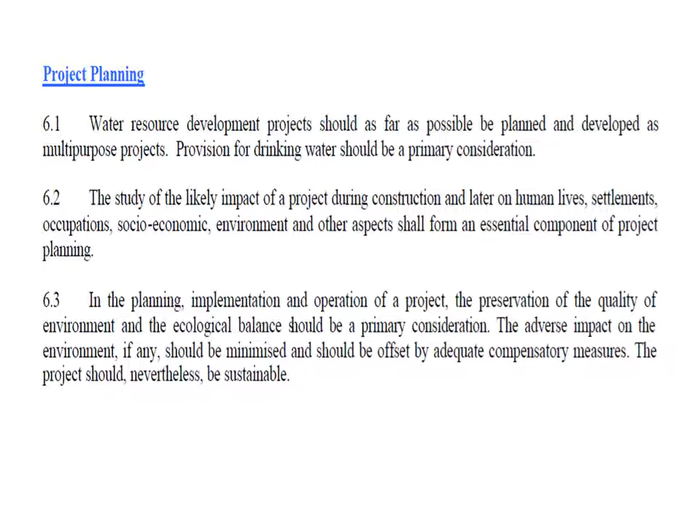With respect to planning, formulation, clearance, and implementation of all these projects upon any such area, keeping in mind the environmental and ecological aspects, an integrated and multidisciplinary approach is required.

This policy also emphasizes these things, and at the same time lays importance on rehabilitation programs, the R&R, the resettlement and rehabilitation of people who usually get displaced because of any such development projects. Special efforts should be given for investigation and formulation of these projects for the benefit of areas usually inhabited by tribals.

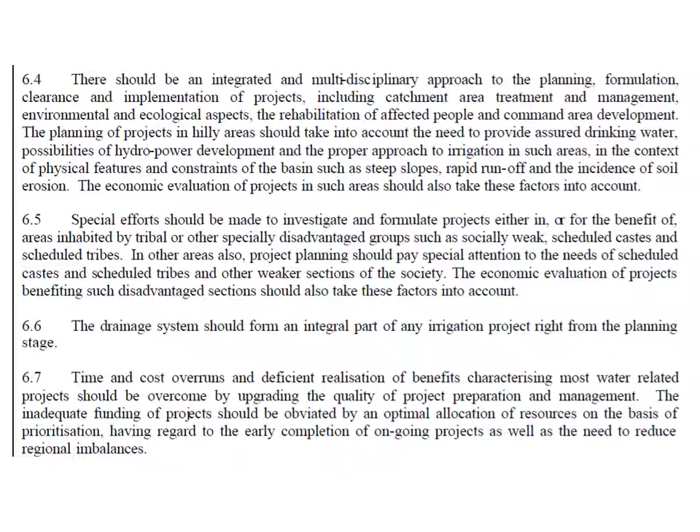Groundwater. Now despite the fact that we have water laws in our country, we have the Water Prevention and Control of Pollution Act 1974, and we also have a Water Cess Act, these two major legislations are quite silent when it comes to groundwater. Although there is a bill which has been pending for quite a long time with respect to groundwater management.

Several states have also adopted groundwater regulation and management, Kerala for example, even Assam, they have one. Now under the National Water Policy of 2002, groundwater development has been given significant importance.

There should be periodical reassessment of groundwater potential on a scientific basis, keeping in mind the quality of the water which is available and the economic viability of its extraction. So economic and qualitative viability has been given due importance under groundwater development.

Exploitation of groundwater resources should be regulated and should not exceed the recharging possibilities, so as to ensure social equality and equity. Any detrimental impact on the environment because of over exploitation of groundwater should be highly discouraged, and the central and state governments are responsible for effectively preventing such over exploitation.

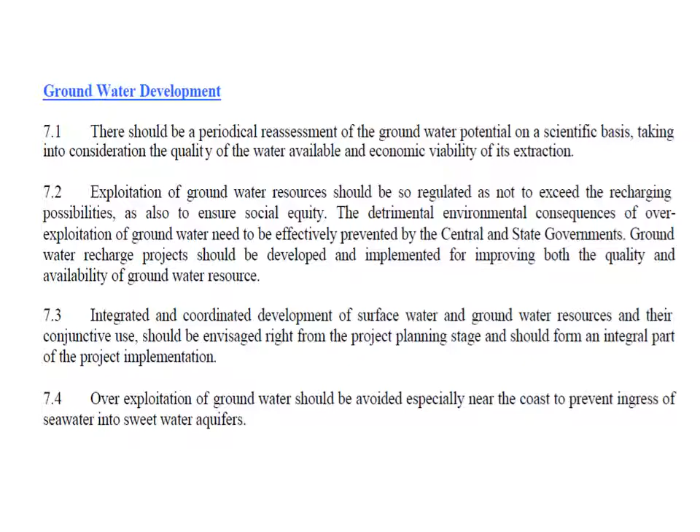There are also water users associations in several states, and municipal corporations do ensure monitoring, because many times, as we see in day-to-day life, people have been digging bore wells to extract groundwater, and many a times they over extract. That is what the municipal authorities are trying to monitor, laying down certain standards and guidelines, and also prohibitions with respect to such over exploitation of groundwater.

Drinking water. Well, when it comes to priorities, drinking water usually gets rank one position. We know that the right to drinking water is a fundamental right, pollution-free drinking water is a fundamental right, but at the same point of time, when it comes to providing the facilities, the service delivery, we do have to pay for the same.

Now adequate safe drinking water facilities should be provided to the entire population. That is what the policy framework suggests, and it is not just applicable to urban areas, but also rural areas.

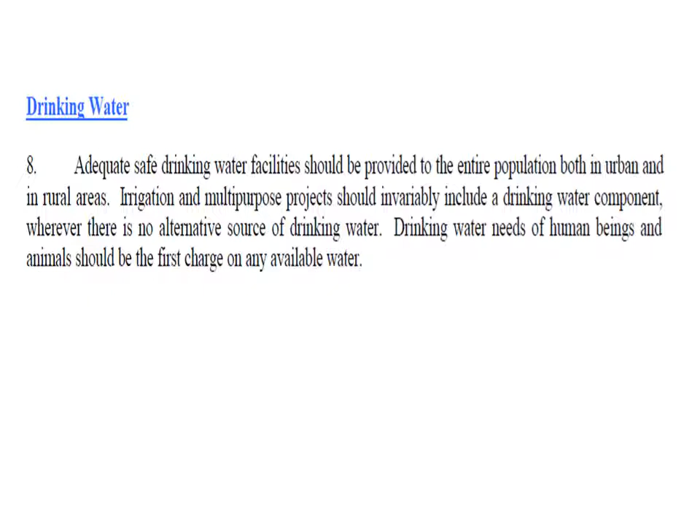Irrigation and multipurpose projects should invariably include a drinking water component, and when there is no alternative source of drinking water, it should be integrated there. This policy also identifies that drinking water is a need of human beings and animals at the same point of time, and it should be the first charge on available water.

Irrigation is another component of National Water Policy 2002, where the planning has been pretty much laid and emphasized. Irrigation intensity should be such as to extend the benefits of agriculture and irrigation to a larger extent, reaching as many farm families as possible. So the maximization of agricultural production, cost-effective irrigation options, and irrigation planning and management of any such project is very important.

There should be very close integration of water use and land use policies. It's not that the land use policy should deviate from the water use policies, and there is a dire need for close integration, because both these elements become part and parcel of agricultural production.

Water allocation is another crucial factor. If you are from a rural area, you must already be aware that when it comes to irrigation, many times the farmers struggle to share the water resources. So water allocation in the irrigation system needs to be done with due regard to equity and social justice. The language of this policy is very clear and pays due regard to equity and social justice.

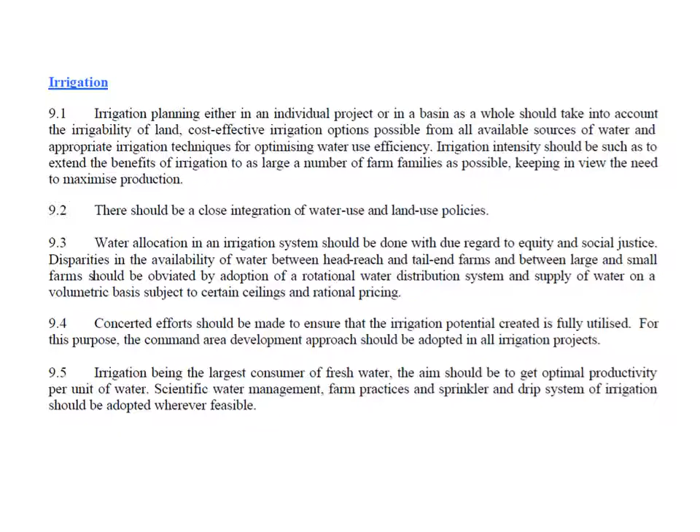Private sector participation has been encouraged in planning, development, and management of water resources projects in the country. Why is private sector participation required? Because private sector participation, along with the government sector, is responsible for several ideas, finance, corporate management, and service efficiency. In order to boost innovation, get financial aid and resources, improve corporate management, and improve service accountability and efficiency, private sector participation will be of great help. This is what the National Water Policy also talks about.

When it comes to quality, not just groundwater but also surface water quality should be monitored. A phase-wise program should be adopted. Whatever effluents the industries are generating should be treated to acceptable limits, levels, and standards before discharging them into natural streams. There should also be a minimum flow ensured in perennial streams for proper maintenance, to keep the ecological balance intact.

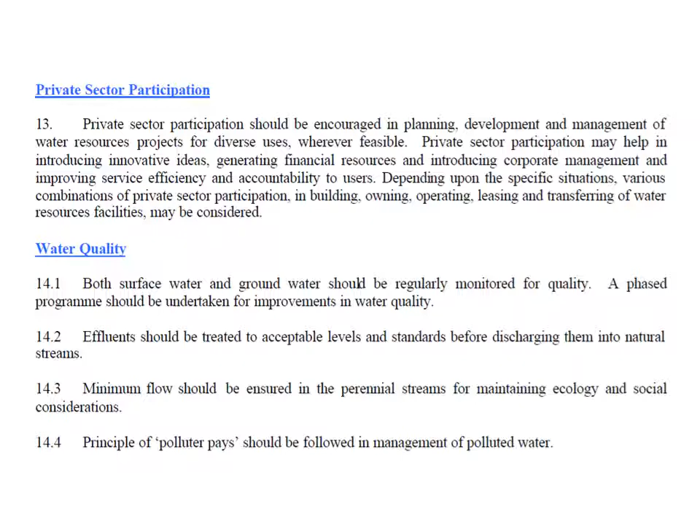And the principle of polluter pays, which we have already discussed, should be followed in management of water pollution. So when it comes to water quality, ensuring standards, and monitoring water quality, the principle of polluter pays should be followed, and the National Water Policy clearly talks about it and envisages the same.

In addition to that, the policy also talks about zoning. It talks about economic development and activities, which usually include not just agricultural but also industrial and urban development. They should be planned with respect to the constraints imposed by the configuration of water availability. That is the reason the policy is suggesting water zoning of the country, which should be guided and regulated based on economic activity. That is the nexus with respect to water zoning.

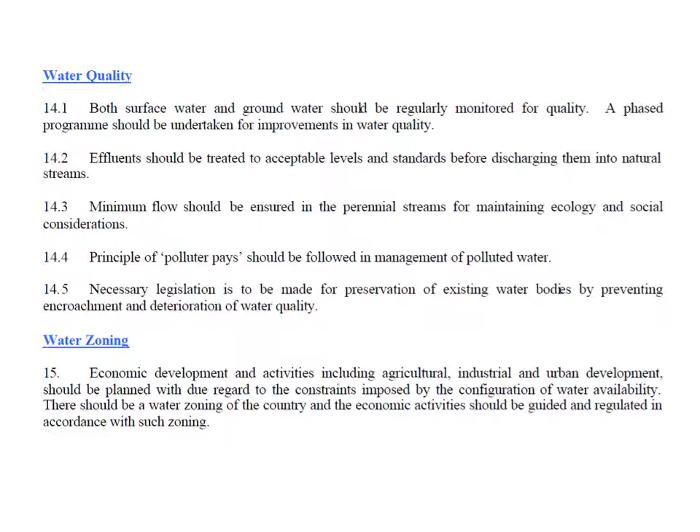Planning, management, and development can never be successful unless you have proper conservation consciousness. That is the reason conservation consciousness has been promoted by the National Water Policy of 2002, through education, regulation, incentives, and disincentives. Resources, in this case water, should be conserved, and availability augmented through maximization of retention, elimination of pollution, and minimization of losses.

For this, several measures can be taken, including modernization and rehabilitation of existing systems, like introduction of recycling and reuse treatment plants, adoption of traditional techniques like pitcher irrigation or mulching. Even drip and sprinkler irrigation may be promoted wherever possible, in order to conserve water. These are some of the traditional as well as modern techniques that the policy talks about, which should be adopted in order to conserve water.

Flood is another major problem which many states face, including Assam. So every state has been encouraged at the national level to adopt a master plan for flood control and management, especially for flood-prone basins. This is a major problem for the government, and hence the water policy talks about adequate flood cushion that should be provided in water storage projects, and wherever possible, to facilitate better flood management.

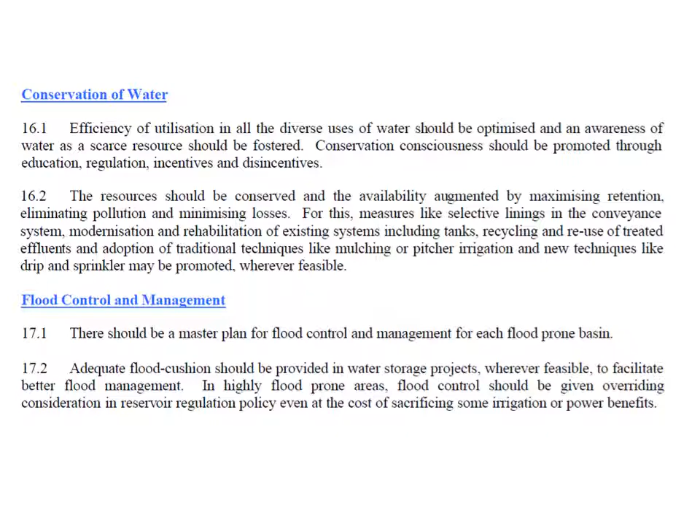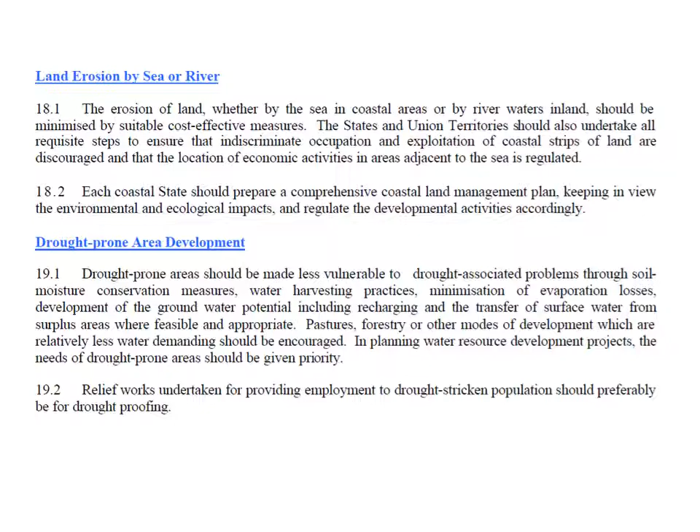You have to do that by taking certain regulatory policies, and you might also have to sacrifice something in the cost of some other benefit. So that is a permutation combination which the states are supposed to ensure with respect to control and management. In addition, drought prone area development and land erosion by sea and river has also found due significance under the National Water Policy of 2002.

In order to improve performance, there is a dire need for a paradigm shift in the management of water resources. That is the reason they have laid emphasis on allocation of funds under the water resources sector, which should be reprioritized to ensure that the needs for development, maintenance and operation of these facilities are met.

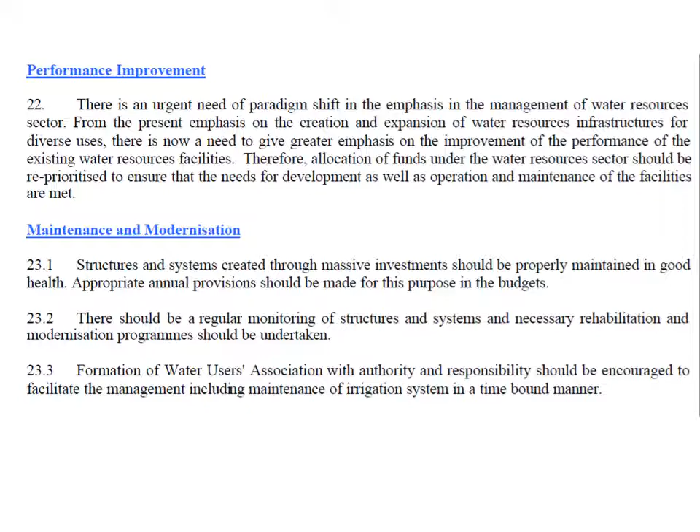Modernization and maintenance requires massive investments. Structures and systems should be created through massive investments, which should be properly maintained in good health, and there should be regular monitoring. Until you have regular monitoring, you cannot figure out what is going on and how far you have succeeded. That is the reason the National Water Policy of 2002 asked for the formation of water users associations, which many states already have. These associations have been given certain authorities and responsibilities to facilitate management, including the maintenance of irrigation systems, in a time bound manner.

Science and technology is something you cannot totally discard, because without research and development, without scientific know-how or even technology, you cannot have an effective and economic management of any resources, be it water resources or any other form of natural resources.

In this 21st century, the frontiers of knowledge need to be pushed forward in several directions, and there should be intensification of research efforts in various areas, which this water policy identifies as, for example, hydrometeorology, snow and glacier hydrology, surface and groundwater hydrology, water harvesting, evaporation and seepage losses, recycling and reuse, crops and cropping systems, and soil and material research. All these sectors are relevant, including water management practices and improvements in operational technology. So science and technology, research and development efforts should be there with respect to all these areas for an effective implementation of the national water policy.

Nothing can be done without proper capacity building programs. The perspective plan for any standardized training should be an integral part of water resource development, with emphasis on training extended to all categories of personnel involved in these activities, which also includes the farmers.